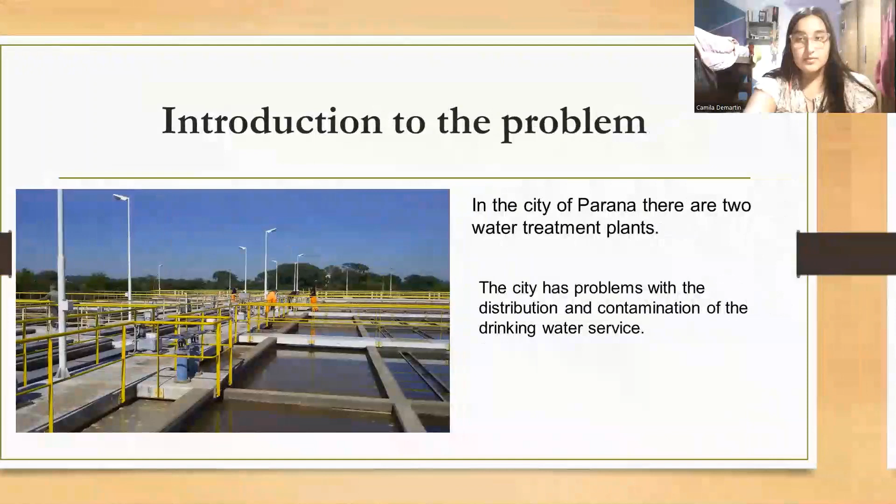The purpose of the presentation is to bring about change. We will improve the service and supply of drinking water, and our project will solve problems for approximately 60,000 residents. It will mean a step forward for the city.

The presentation is organized as follows. First, the part of the city where the Southeast zone of Paraná is located will be described, detailing the affected area. Second, we identify the problem and its cause. Third, we identify the consequences of the problem as well as its impact on society. Finally, a solution will be proposed.

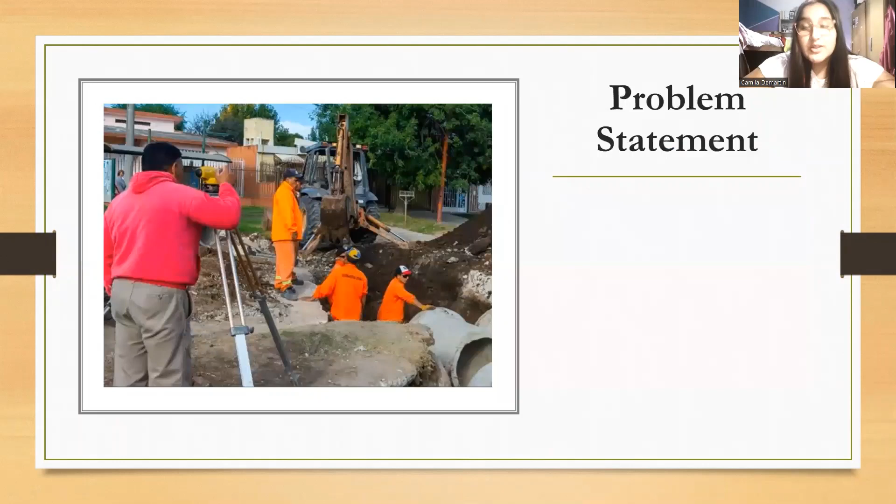Currently, this area is greatly affected by the number of works. The problem presented here is connected with the low pressure and the bad condition in which the water reaches the southeastern area of Paraná.

As I have mentioned, the city of Paraná has two water treatment plants that feed the city. The city meets the Paraná river on its bank, so when there is a low level of flow, it affects water intake. The neighborhoods suffer days without water supply, and generally, water supply cuts occur more frequently during the summer season.

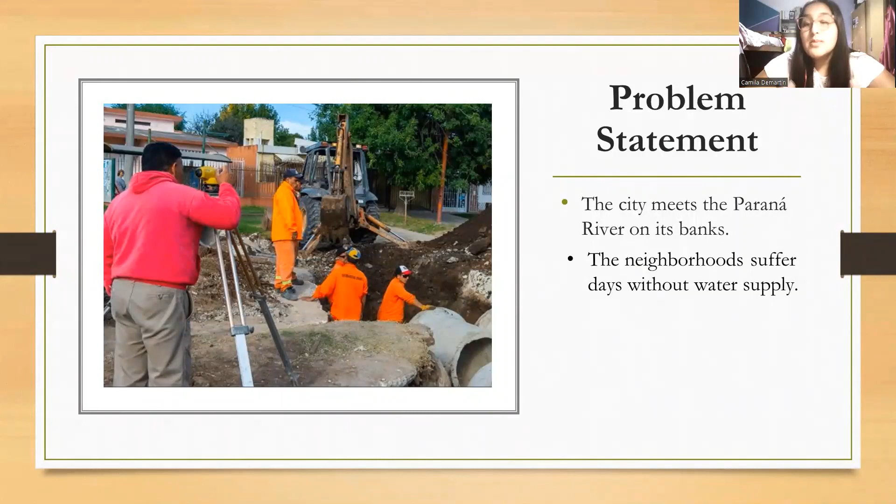There are constant works repairing pipes. For this reason, the streets of this area suffer the most due to the pipes, among other issues.

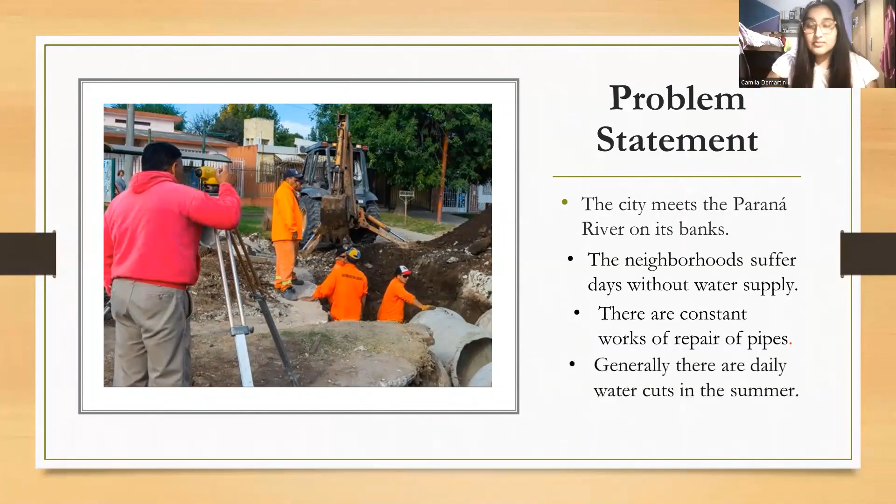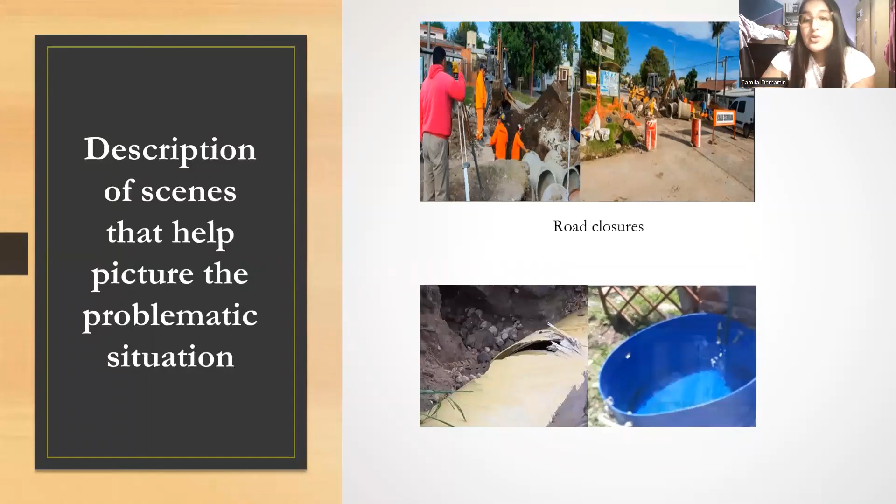There are four pictures in the presentation: road closures, a flood in the street, and water collection. These images represent the works of reconstruction of pipes and temporary repairs that the area suffered.

In the image below, there is a bucket with water, which represents the stories of neighbors who say that during the day they don't have water service, so they wake at night to collect water and fill reservoirs.

There are neighbors who say that not only many children live in the area, but also people with disabilities. As well as this, there are broken pipes which interrupt the water service. Water is essential for day-to-day life.

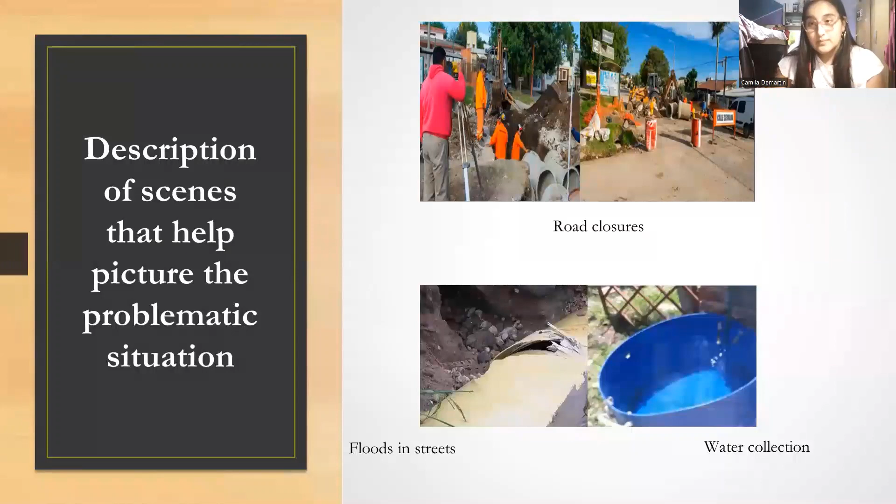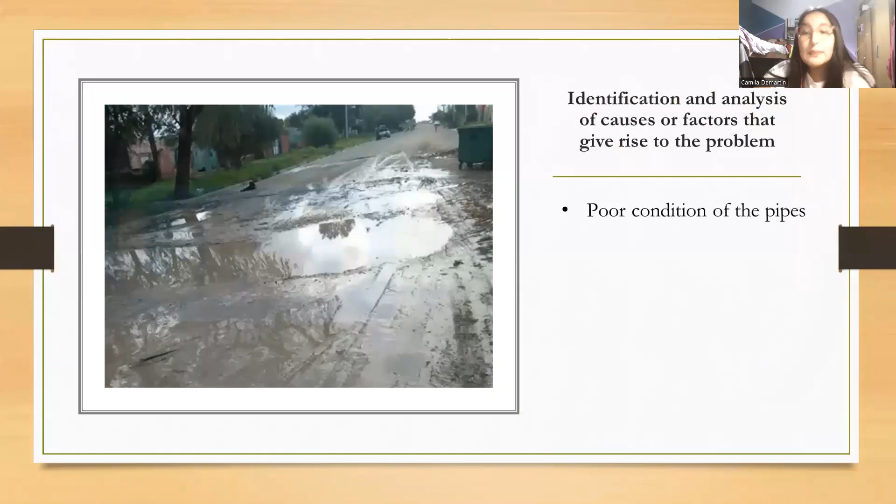The causes or factors that trigger the problem are based on the lack of or poor distribution of water in the southeastern area. One of the main causes is the rupture of pipes or aqueducts, or the poor condition of the pipes. It has been reported in some news that some water distribution works have been carried out with pipes that do not yet comply with the technical specifications.

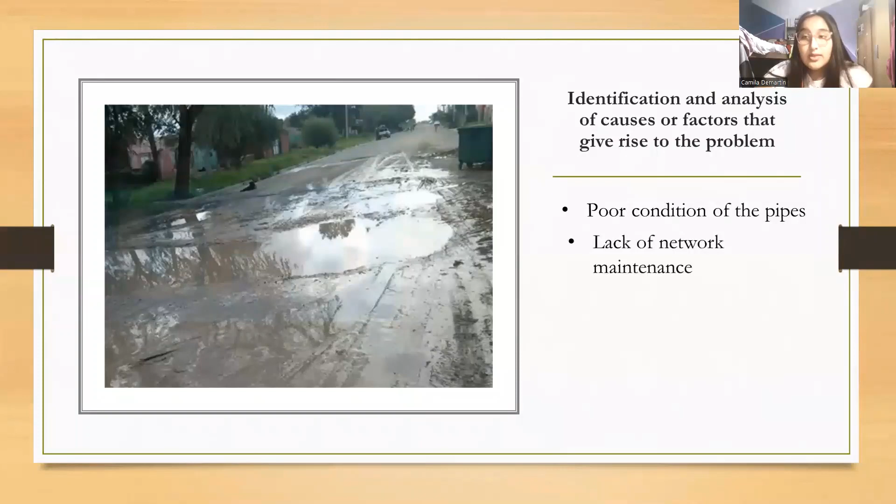Another situation is the lack of network maintenance, where the street cannot support the weight of the machinery, and this pressure causes the collapse of the pipe systems.

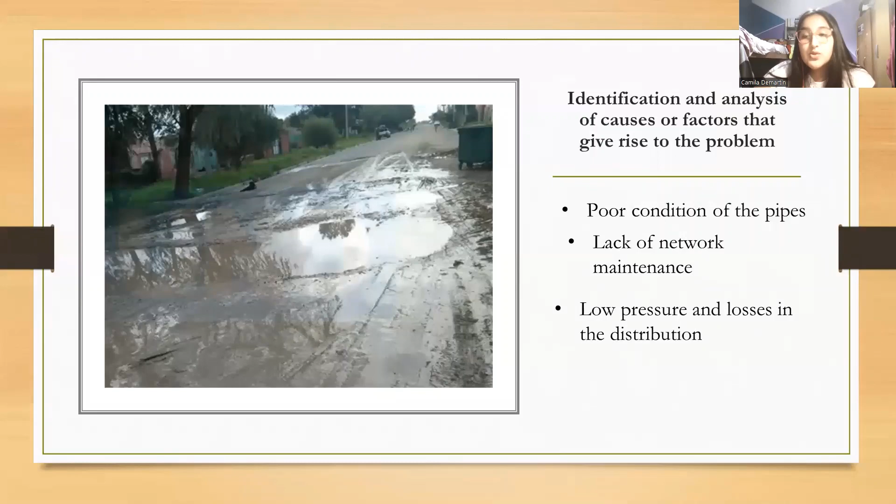Another factor that affects this is the different heights at which neighborhoods are located, which causes low pressure and loss in the distribution. The consequences of these problems translate into poor living conditions, loss of biodiversity, and deterioration of pipes.

In relation to the poor living conditions, there is scarce hygiene, cleaning problems, and discomfort among the inhabitants, due to the lack of basic resources to satisfy their needs.

Regarding biodiversity, the vegetation present in parks, schools, and houses has lost the possibility of growing and thriving.

Finally, when the area suffers from extensive droughts, this can cause straining in the pipes, which can lead to cracks or even total damage to the pipe system. The cracks lead to a loss of approximately 50% of water.

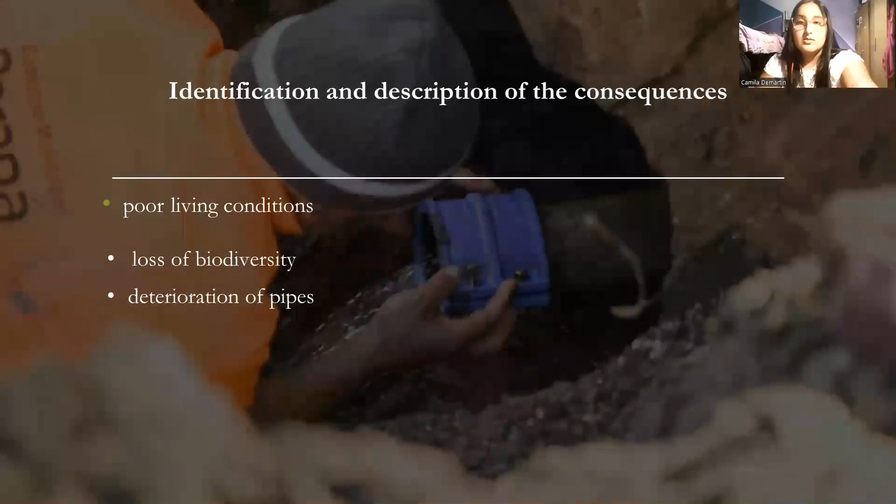Problem approach: the main solution proposed to the problem described above is to increase the distribution pressure of the network, solve the issues in the pipes, and address the implementation of an underground water storage tank.

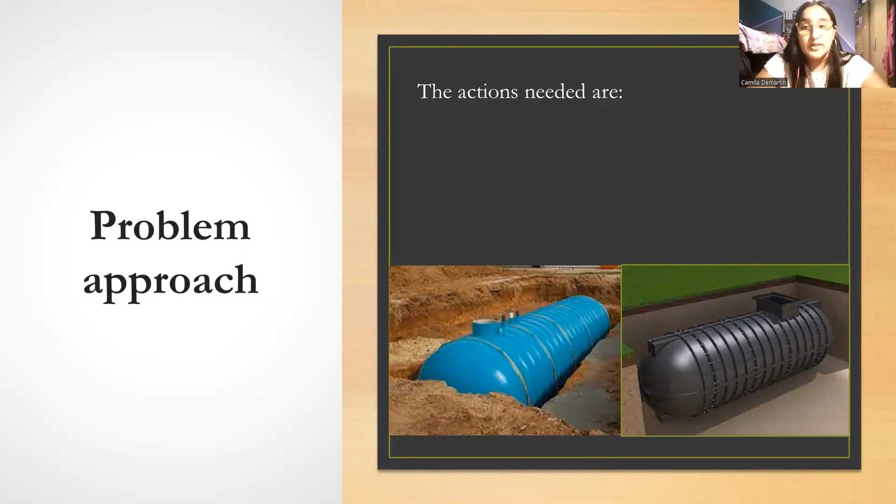It is known that the amount of water supplied by the water treatment plant is not what is necessary for the number of current inhabitants of the city. This is why some neighborhoods suffer from water supply shortages more than others.

For this reason, I propose the placement of an underground water storage tank, which will be located in a currently unoccupied vacant lot in the area of Miguel David and Pedro Martinez.

It will be connected by pipes from the Parque del Lago, approximately 2.6 kilometers away. This tank will operate as a water collector and distributor for the neighborhoods of the southeastern area of Paraná for days when the water service is interrupted. The neighborhoods call this a water reserve.

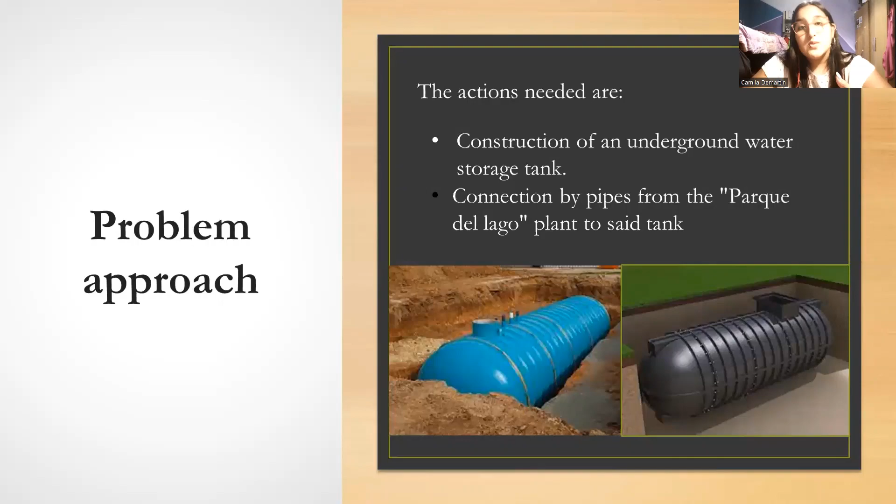Problem approach: the actions needed are repairing the pipes and training construction personnel. In connection with the pipes, it will be necessary to evaluate a project of restoration of the pipes in different stages. This will improve the service in quantity and quality, since deterioration in distribution pipes generally causes a type of contamination, so the water that leaves the plant is not the same that reaches the house.

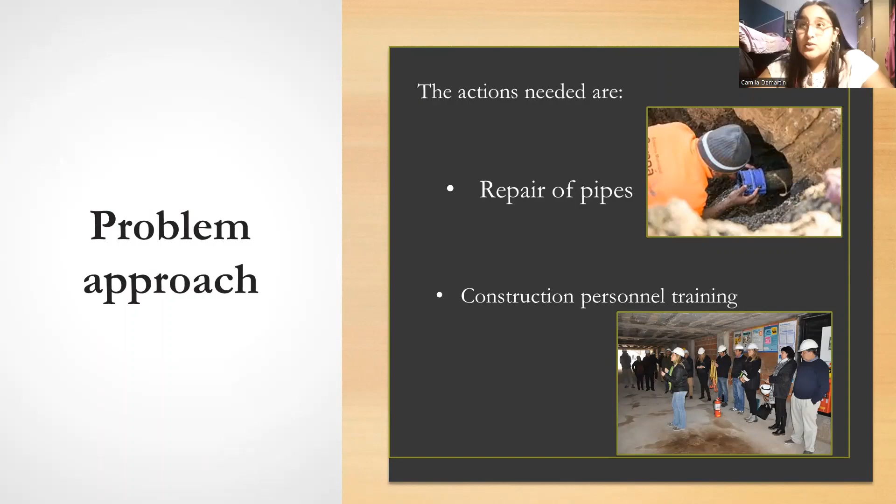This solution has both a positive and a negative aspect. Regarding the positive aspect, the people affected by these problems will have better service with less contamination in the water that reaches their homes.

There will be fewer causes of water problems, complaints to the municipality will decrease, there will be improvements in the quality of citizens' lives, and improvements in biodiversity and industry.

Regarding the negative aspect, this project represents expense commitments. More staff is needed, and one or more sources of income are needed. It will require more people for work in planning, evaluation, and other factors.

Finally, I can conclude that this problem of lack of drinking water supply in the southeastern area of Paraná is of great importance and is an issue that must be resolved. The aforementioned problems leave many families and neighbors without access to drinking water service in their homes and workplaces. The proposal presents more advantages than disadvantages and demands commitment and organization.